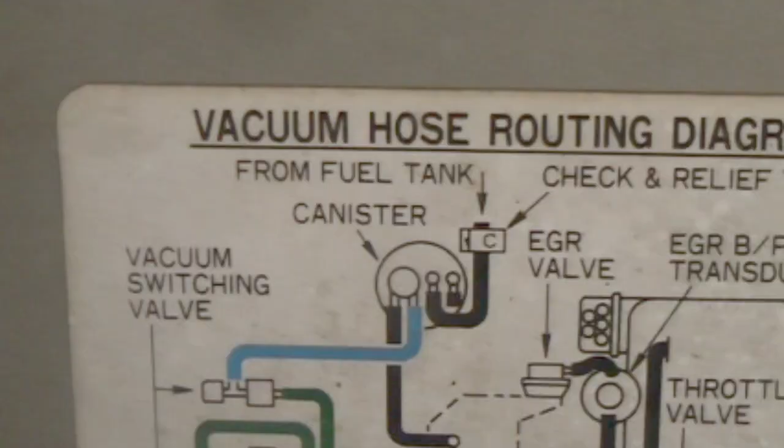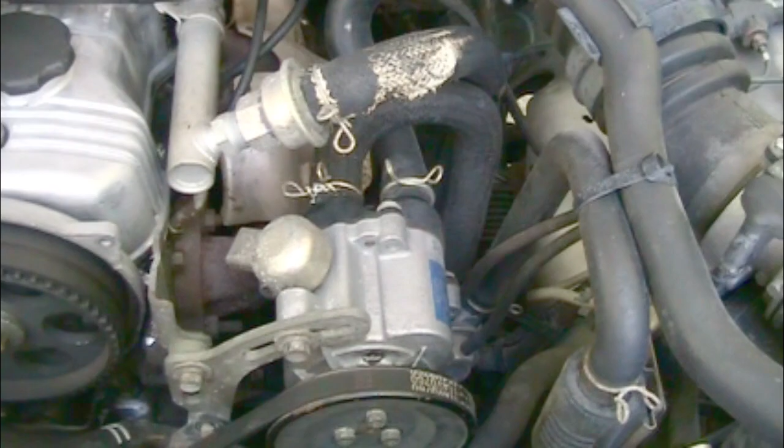Okay, I'm going to be going over the vacuum hose arrangement on the iTech. It can be kind of intimidating and troublesome. I'm going to start over here with this smog pump situation, because I'm not really going to be getting into that so far as disassembling. So you've got

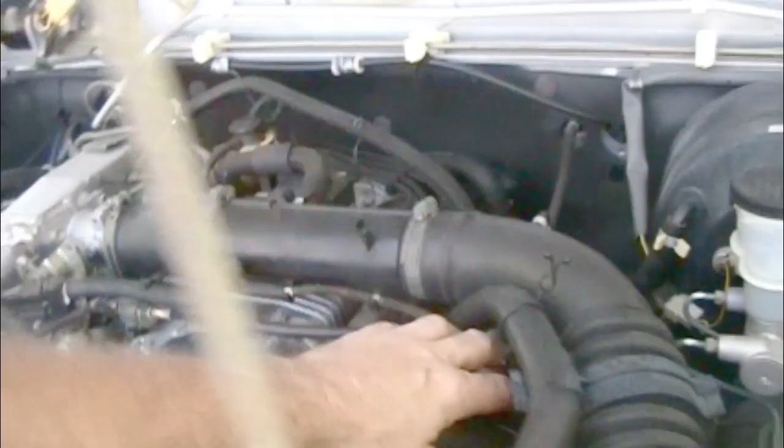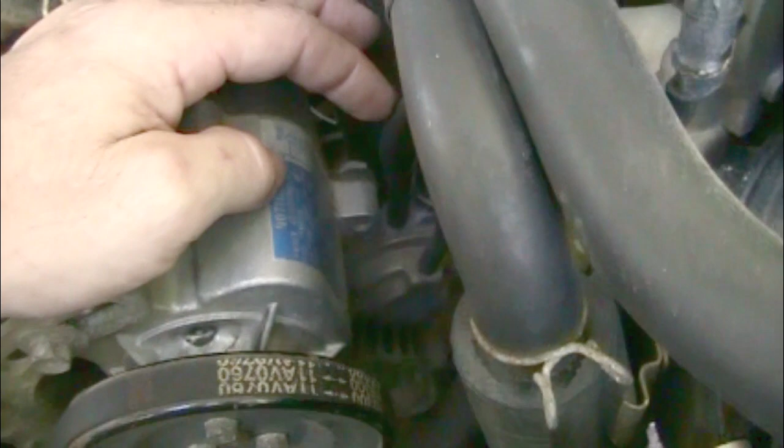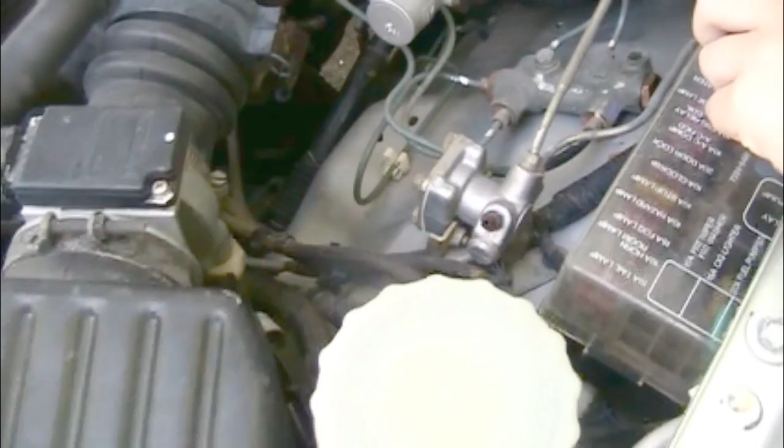the smog pump vacuum is pulled from this port right here on the intake. It runs across here and comes up here right into the front of this vacuum switching valve. Coming out of the back, it comes across the middle of that arrangement there, runs down to this diaphragm on the smog pump. The other one runs up to here and runs to the top of that. That's the vacuum for the smog pump.

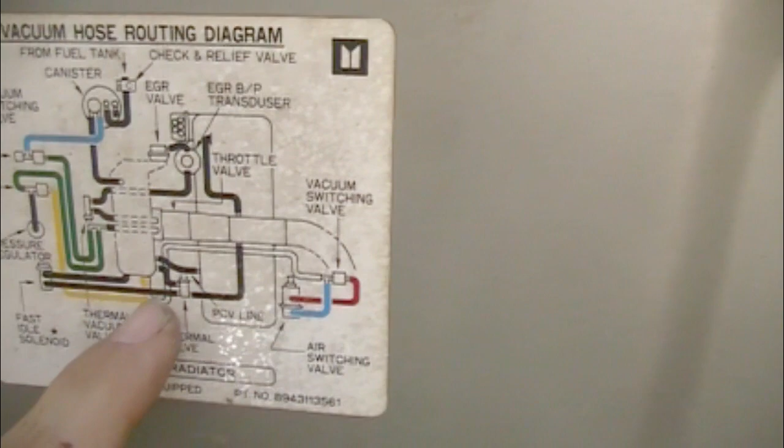This is the vacuum switching valve on the fender well. This is the air switching valve for the smog pump, and you can see they show that this vacuum line comes in here to the front, and then at that T the other one comes off, and then off the back the other one comes off there. Okay, we've got the brake booster vacuum. This port right here is used primarily for the evaporative canister. You do have a T on this one. This is where you would hook the cruise control if you had it.

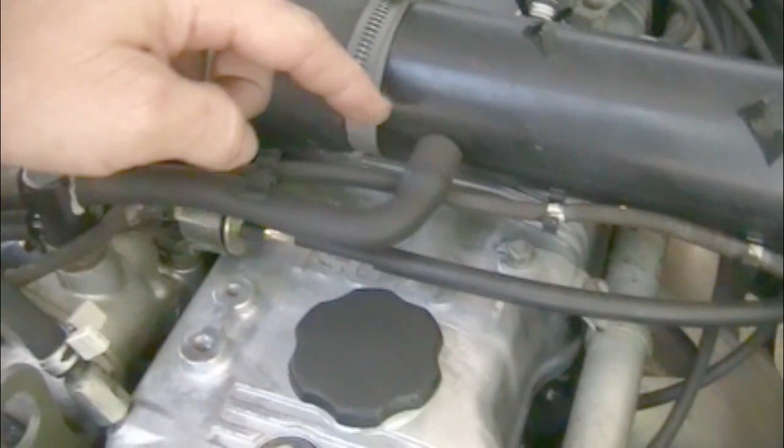Okay, this thing right here is for fast idle, and you've got your thermal vacuum valve right here. This hose right here provides constant vacuum. It runs through this valve here, over to here, through this bracket, over to here, to the fast idle solenoid. This comes on when you click your AC on. Anytime the AC compressor kicks on, this valve will open, allowing more air into the plenum. That's all that does, is it bumps the idle, essentially, to offset the load from the AC.

This one down here is activated when the engine is running hot. Typically I've experienced this when you get low on water and there's steam in the system. This switch right here will kick on and off, and it runs right over here, and all it does is the exact same thing. It'll allow extra air into the plenum, bumping the idle, and typically you'll get like a rum, rum, rum, like an on-off oscillating high idle with that.

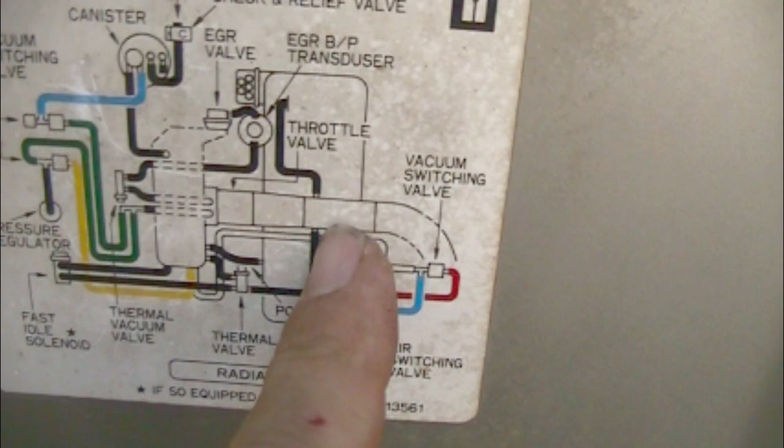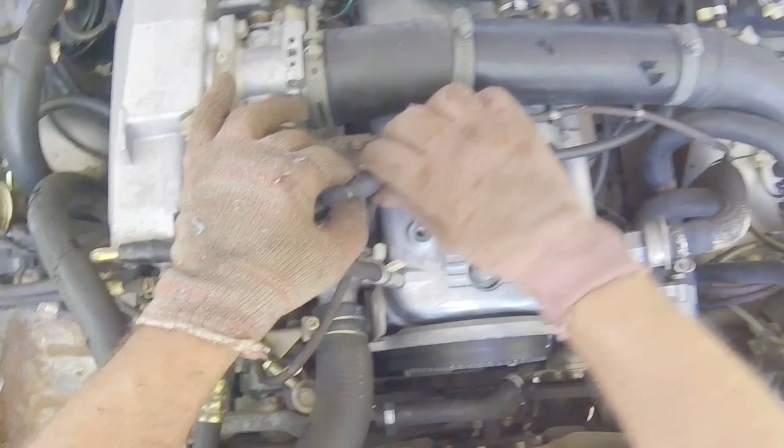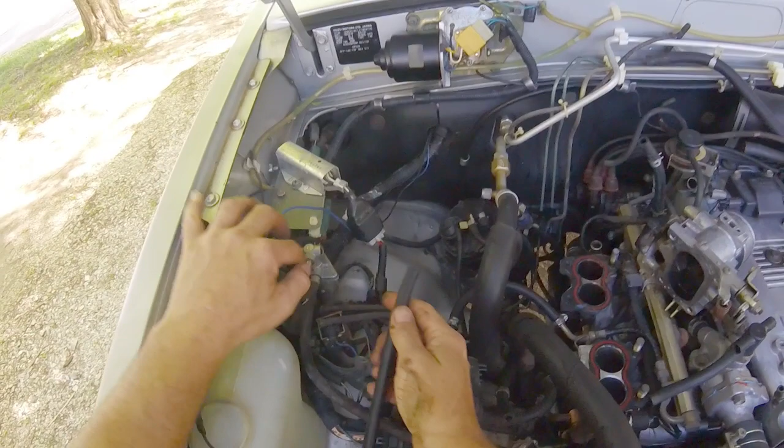This is the vacuum line, comes off of the intake over to the thermal valve, over to the fast idle solenoid and back, and then this is that jumper that I was telling you that'll rev if the engine's got steam in it. I'm gonna get this one off. Looks like somebody's epoxied this, so I'm gonna try to be really careful. These are known for breaking. They're very brittle. To the motor. That's the AC fast idle solenoid stuff. I got 1/4 inch for that.

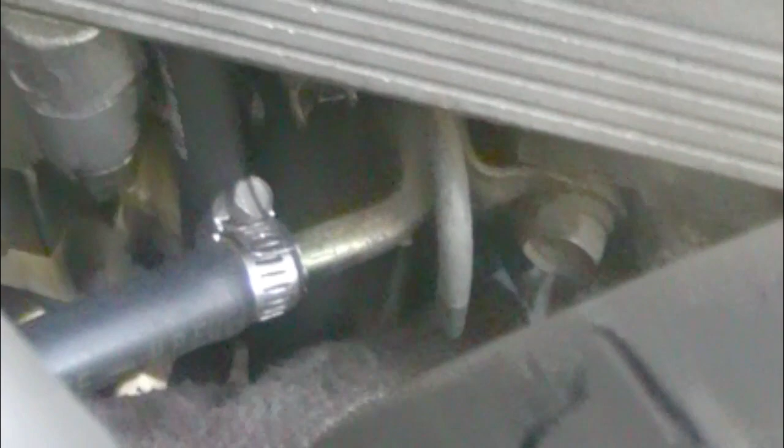Now we've got this EGR hose from the blue nipple here up to this one right here. This runs under the plenum and comes up right here, that metal line, and then comes up. You'll have the other side come out to the EGR. And then right here you have exhaust gas will run up to here and come under to the bottom of the back pressure transducer.

So basically the way this works is there's vacuum provided to this right here, and when you get back pressure from the exhaust, it opens this and allows vacuum to the EGR diaphragm. It opens the EGR and allows exhaust gases that come in from that metal tube that runs up from under here. You've got this huge metal line that runs up and screws into the bottom of the intake. That's the exhaust gas that's coming in from over here.

This tube runs along the back, screws in to the bottom of the intake right here, and then when this diaphragm opens, it allows those gases into the combustion chamber. It's supposed to help cool combustion temperatures.

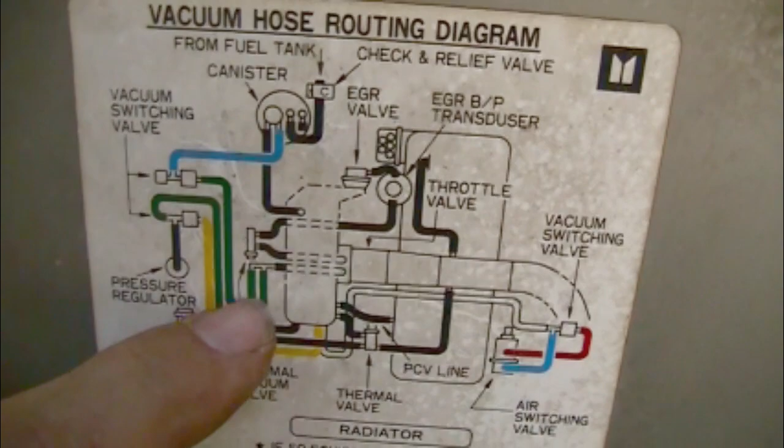The vacuum port on the bottom of the throttle comes over. This is that baby blue thermal vacuum valve. This is that metal hard line that runs underneath to the back pressure transducer, and then the vacuum line over to the EGR valve. Maybe. Okay.

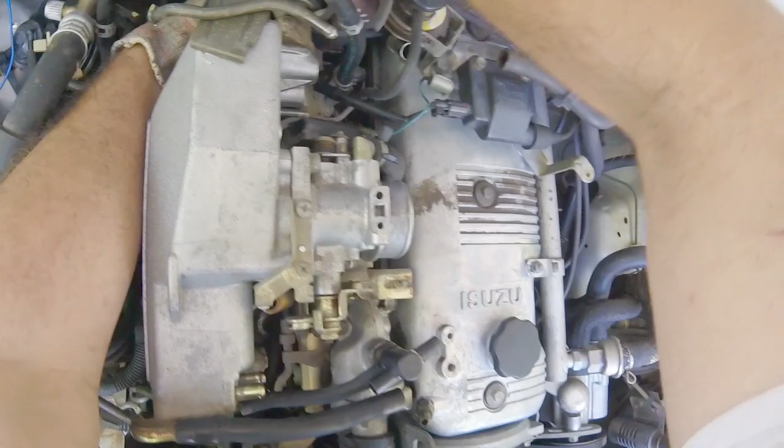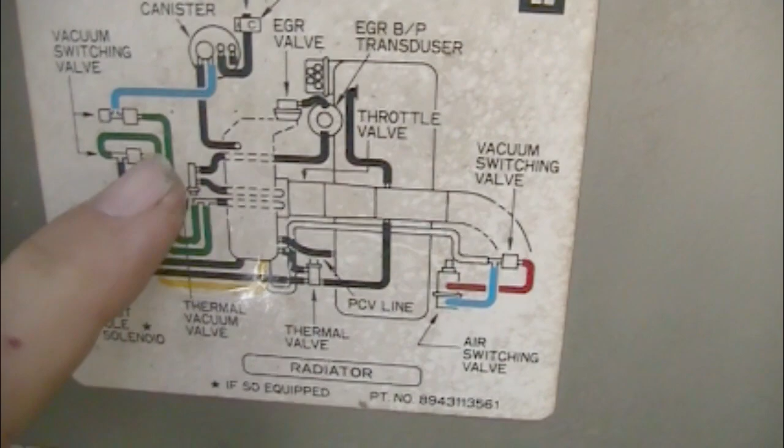Okay, this second port here runs out up to the top here, across, and into this vacuum switching valve right here on the top. Okay, and this is the yellow one, coming out of the front of the plenum over to this switching valve. So then this other hose here comes off and runs over to the top of the fuel pressure regulator, and if you've got a later model iTech, then the hose will run from here over to there. Okay, right here we've got a one-way check valve. This is the vapor from the fuel tank that runs up into the charcoal canister.

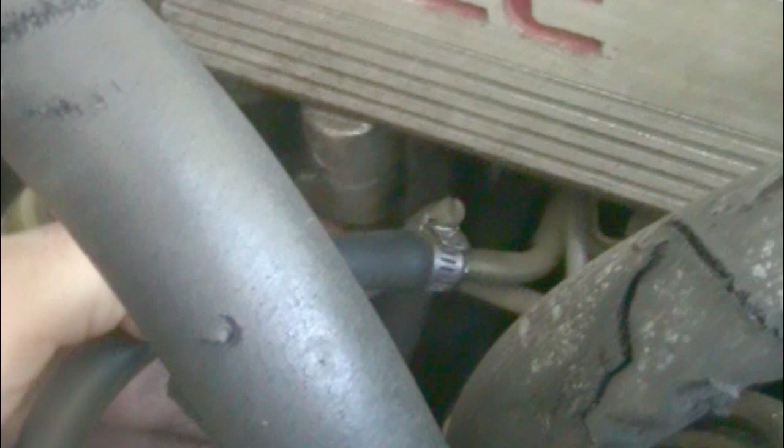This one here is the purge for the charcoal canister, and it runs right up into the port here. It's a very large vacuum port on the I-TEC. That's where that one goes. And then this one is the one that actually activates this diaphragm to open that discharge. It runs up here through this setting.

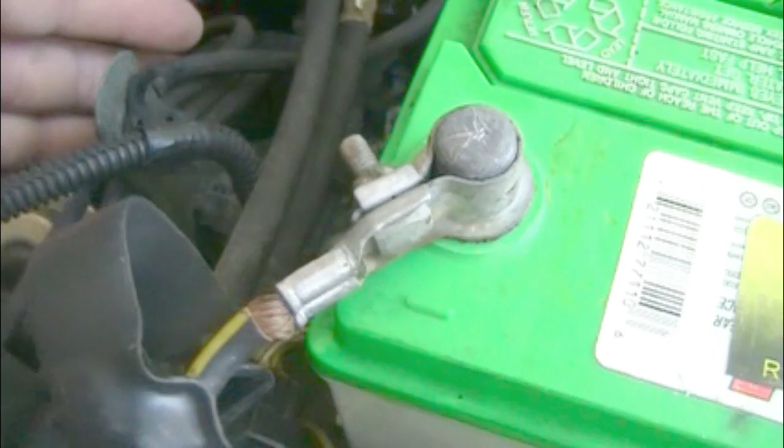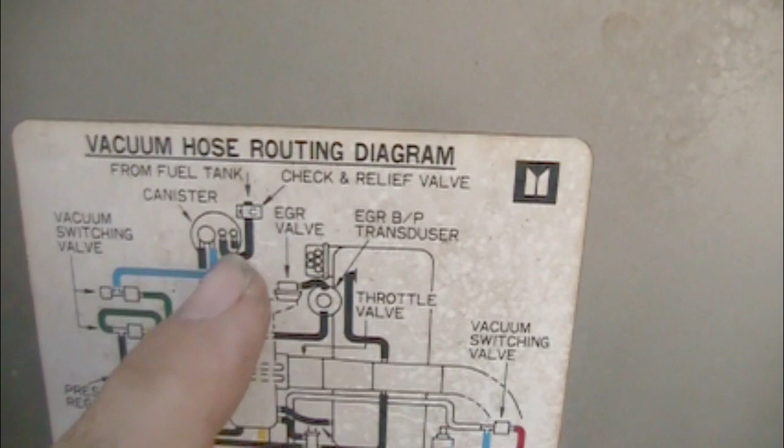Over here, it's the third one down in this assortment. It runs over and to the side of this vacuum switching valve right here, comes into the side right there. That's showing you here from the fuel tank to that check relief valve, then the vacuum switching valve, and then the purge that goes into the intake there.

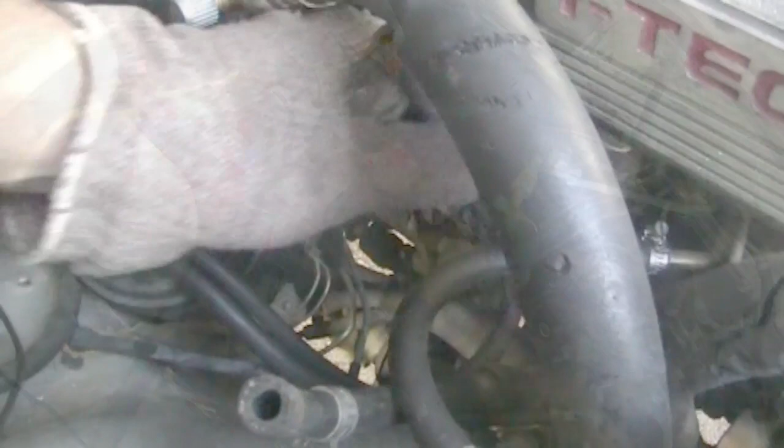Now you see that this is referring to vacuum ports on the bottom side of your throttle. So on the bottom of this, there are two ports that stick out the bottom, and that's what these are referring to right here. This one right here will come down to this T connector, and this is the blue thermal vacuum valve. So this hose basically runs from the bottom of that under the I-TEC, comes out right here, hits this T connector right here, and then they run up.

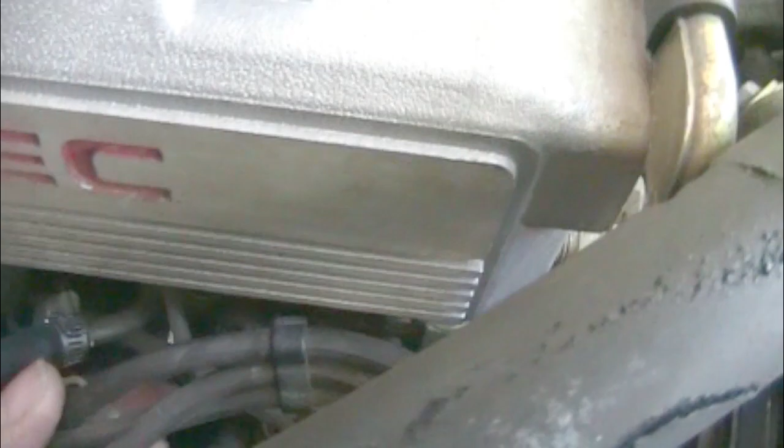One's on the top and one's on the bottom in this connector. They come up through here, run through this, and one comes in here, and the other comes in the front on the bottom here. And that's displayed right here.

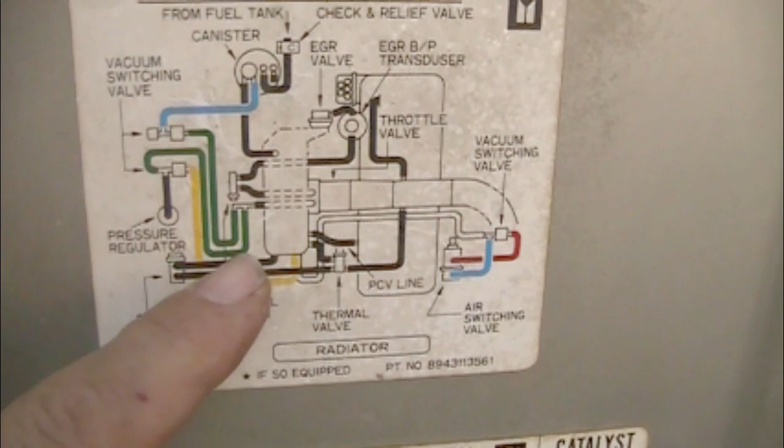You get this one coming up, goes to this vacuum switching valve that also goes to the fuel pressure regulator, and the other one comes off that F and comes up over here to the one that activates the charcoal canister. This is where the other hose that runs off of the throttle down to here will connect to here, and then the other side will come off of here and come up to here.

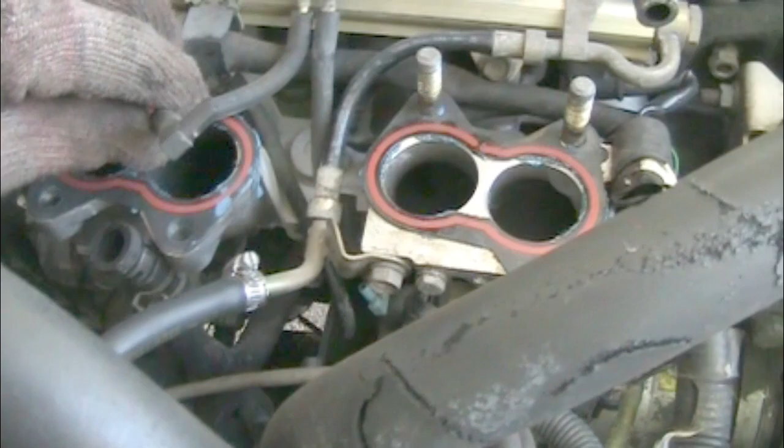Okay, so I've got the plenum off now, and you can see these hoses a lot clearer. This one goes down to the F connector, and this one right here runs down to the blue, that baby blue thermal vacuum valve right there.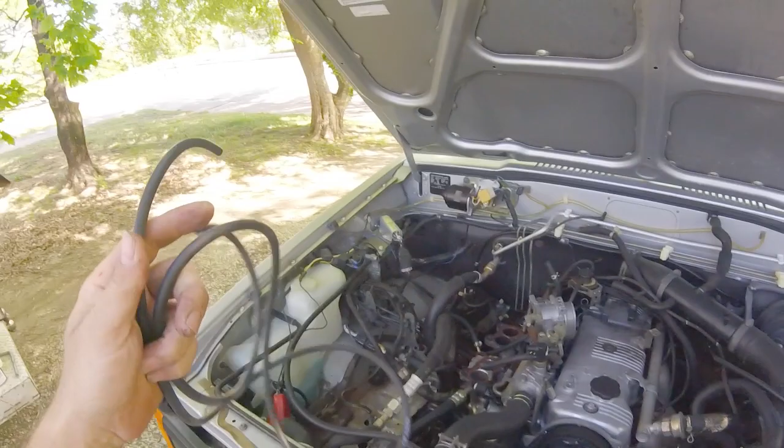And then I got 6 feet of 5/32nds to do all these others, all this stuff here that plugs in here and here. And this one needs to run down and attach onto that blue thermal vacuum valve right there. So I'll cut that. This one right here will hook on here.

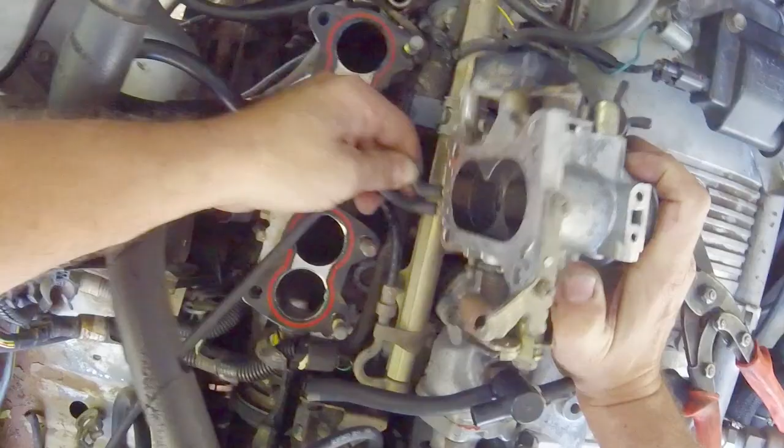And it's going to come down here to that little F connector that'll hang out right about here. Got the F connector here. That'll hang out right in there.

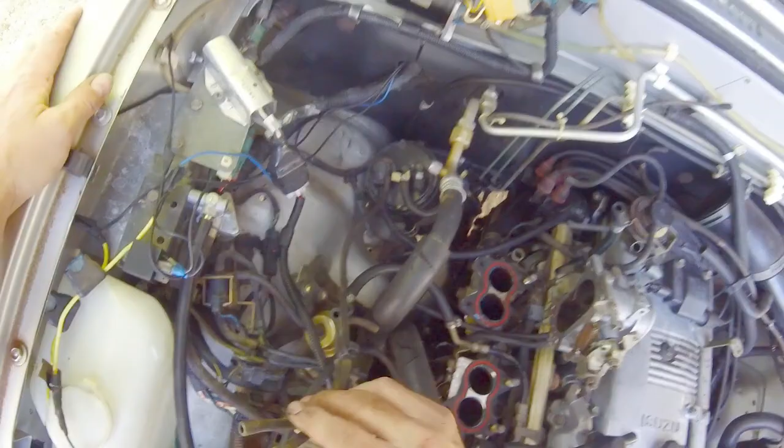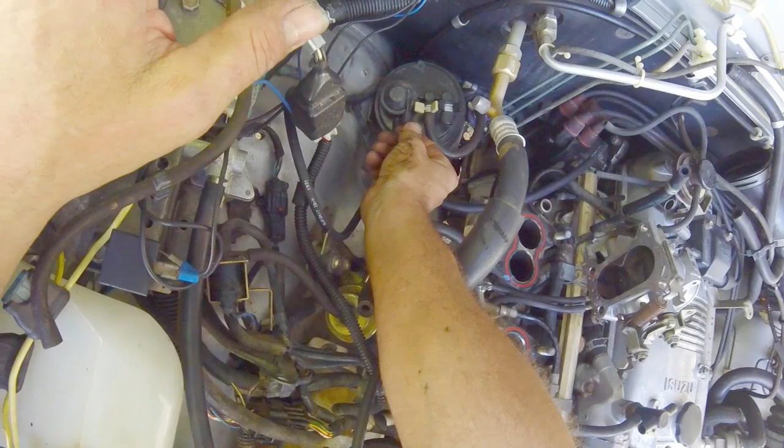So these are cracked and brittle here. I'll go ahead and replace this section here. Let's put a new piece on there. Replace this one. It's pretty cracked up.

Okay, so I'm basically just going to be following my diagram here to remind myself where these go. It comes off of here and over to the vacuum switching valve.

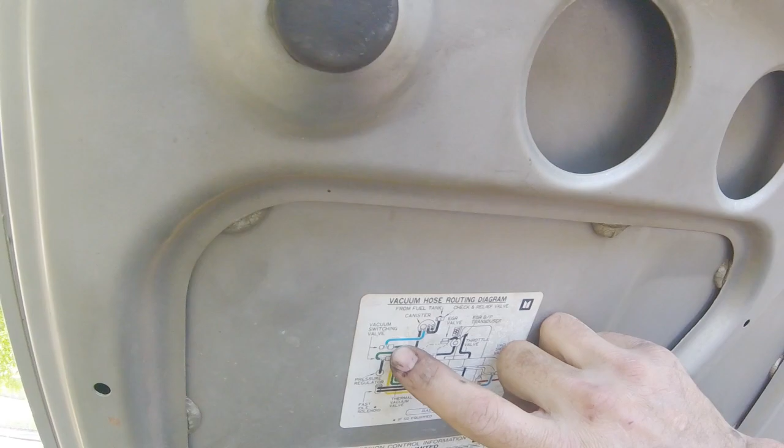Okay, this one's going to come off the F connector. And go to the other side of that, which is here.

Okay, this one will go to the other F connector. So we'll cut a new piece for that.

That right there, that'll go to the front of the plenum right there. These are all, yeah, not too great. I'll cut some of this stuff down.

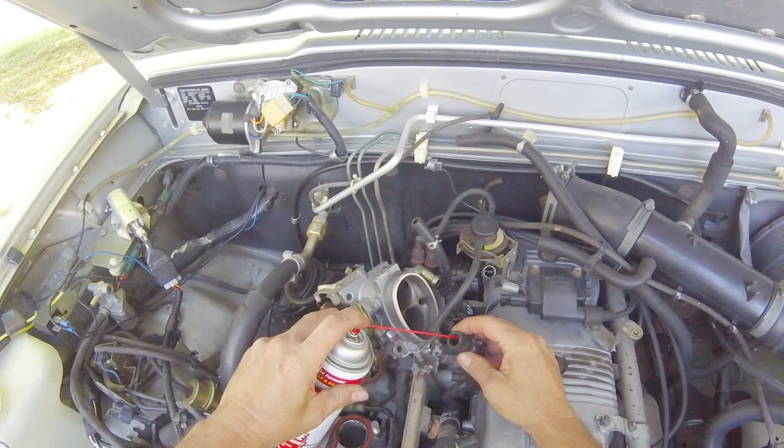This is the hose that goes down to the idle air control valve, which opens when it's cold to create a choke type situation. I'm gonna go ahead and spray some carb cleaner down in there just to free that up, make that thing work clearly.

All right, so I've got this big hose here that comes out of the bottom of the idle air control valve. I'm gonna get it right there where it goes.

Okay, so what I've just done is reconnected the hose that goes from here, from the top of the throttle, down to the idle air control valve. It comes out of the bottom of the idle air control valve and then connects to the plenum right here, that big hose with that hose clamp.

Okay, so I got the intake back on. All the hoses and everything are redone as necessary. And she's ready to go.